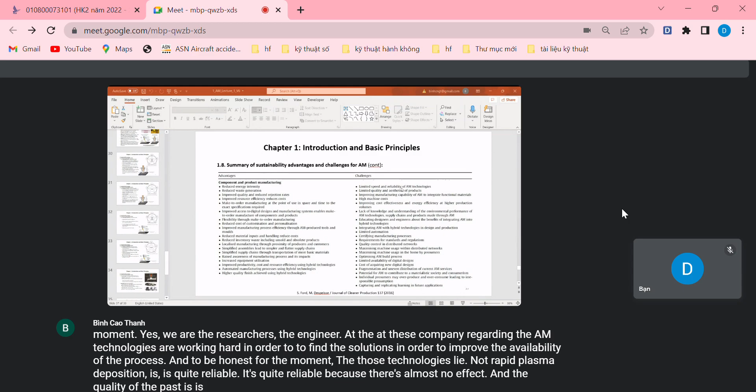Even better than the forged part. But the other technologies need to be improved as well. And yeah, this is the point.

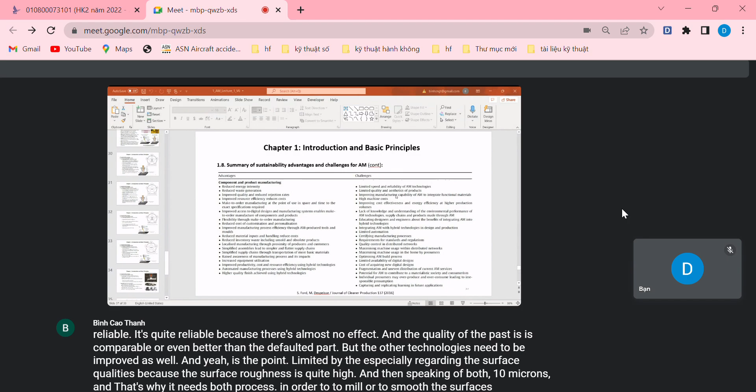Limited quality, especially regarding the surface qualities, because the surface roughness is quite high, generally speaking above 10 microns. That's why it needs post-processing in order to mill or smooth the surfaces, which negatively affects the aesthetics of the product.

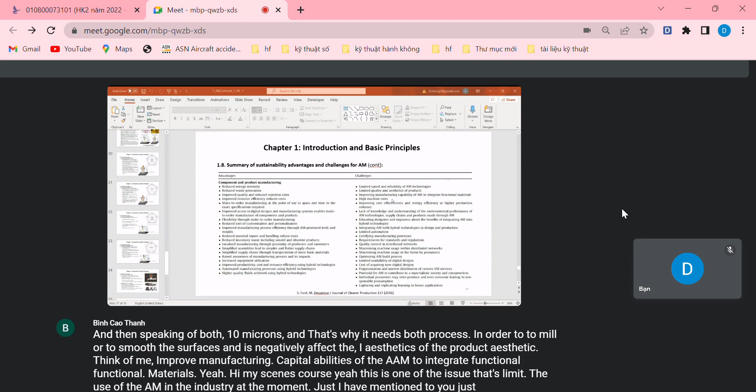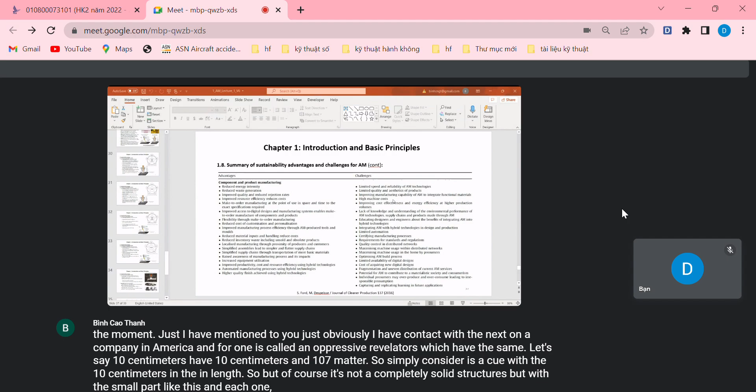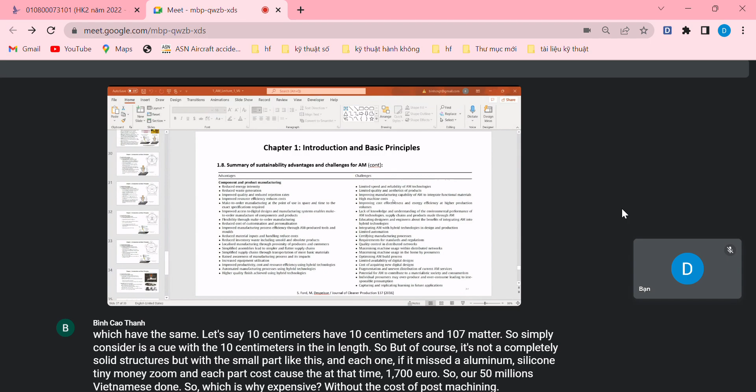High machine costs. Yeah, this is one of the issues that limit the use of AM in industry at the moment, because as I mentioned to you previously, I have contact with an external company in America, and for one part called pressure regulators, which have the shape of, let's say, 10 centimeters by 10 centimeters by 10 centimeters, so simply consider it a cube with 10 centimeters in length. Of course it's not a completely solid structure, but with small parts like this, if made of aluminum, silicon, tin, magnesium, each part costed at that time 1,700 euro, so around 50 million Vietnamese dong. Which is quite expensive without the cost of post-machining, just the 3D printing cost. So high machine cost and high material cost as well, because it's not easy to fabricate aluminum alloy powders.

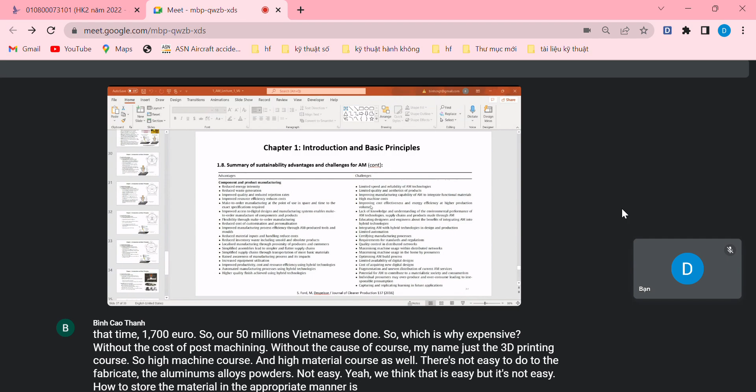Not easy. We think that it's easy, but it's not easy. How to store the material in the appropriate manner is a strict process as well. We have to carefully handle the powders, not only for human health, but also for the quality of the input material. So one of the reasons that the costs are really high.

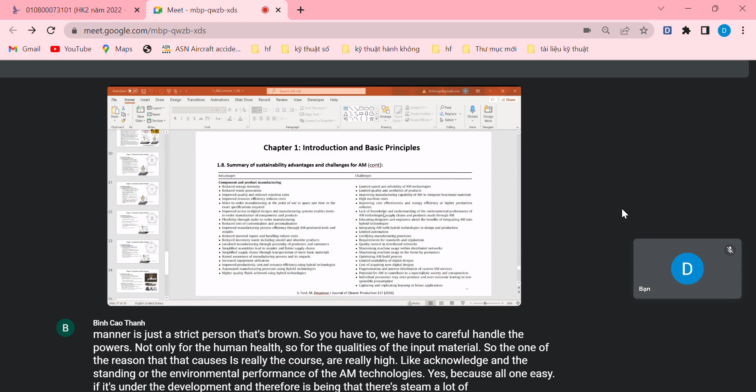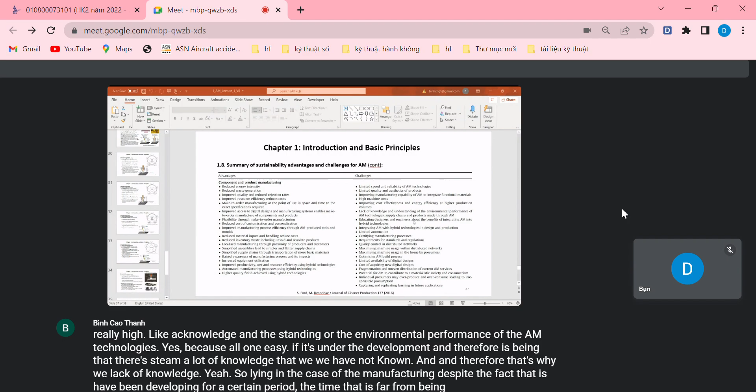Lack of knowledge and understanding of the environmental performance of the AM technologies. Yes, because this is an issue still under development, and therefore there's still a lot of knowledge that we have not known, and that's why we lack knowledge. So like in the case of additive manufacturing, despite the fact that it has been developing for a certain period of time, it is far from being fully explored, and that's the point.

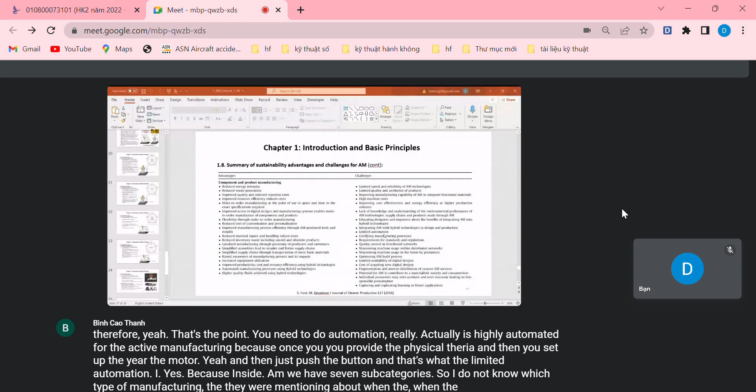Limited automation, really? Actually, it's highly automated for additive manufacturing, because once you provide the feedstock material, set up the motor, and then just push the button, that's all. Limited automation, because inside AM we have 7 subcategories, so I do not know which type of additive manufacturing they were mentioning when they wrote here limited automation. It's hard to discuss this, but okay.

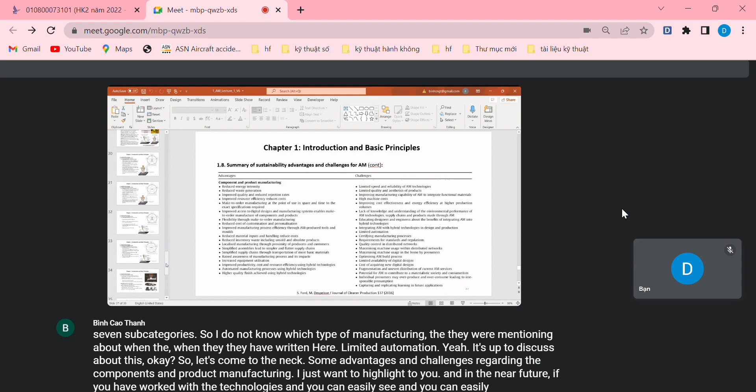So let's come to the next: some advantages and challenges regarding components and product manufacturing. I just want to highlight to you, and in the near future, if you have worked with the technologies, you can easily see and find the disadvantages and advantages of the technologies that you are working with.

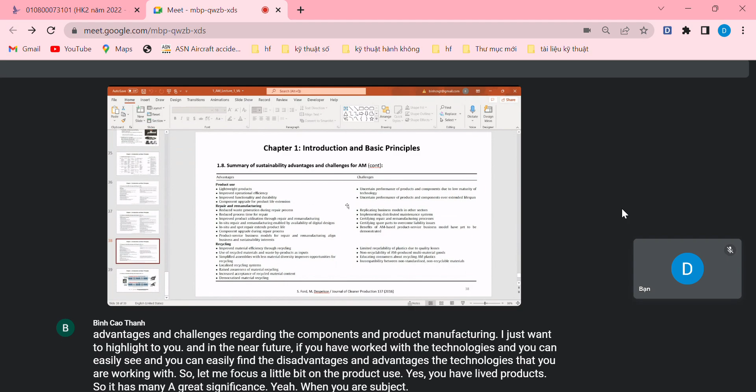So let me focus a little bit on the product use. You have a lightweight product, so it has great significance when you subject these products to the utilization phase. Improve operational efficiency, sure. Improve functionality and durability, yes. And upgrade for product life extension, for sure. This means that you can upgrade, you can optimize the part. So in other words, after the upgrade, you can improve the performance, especially regarding the product life. So the life can be extended, it's simply like this.

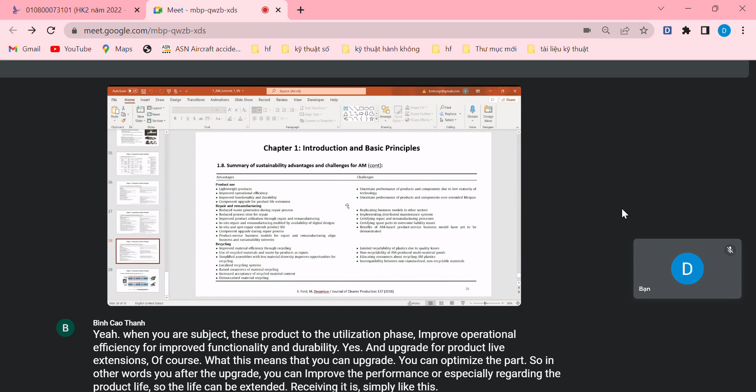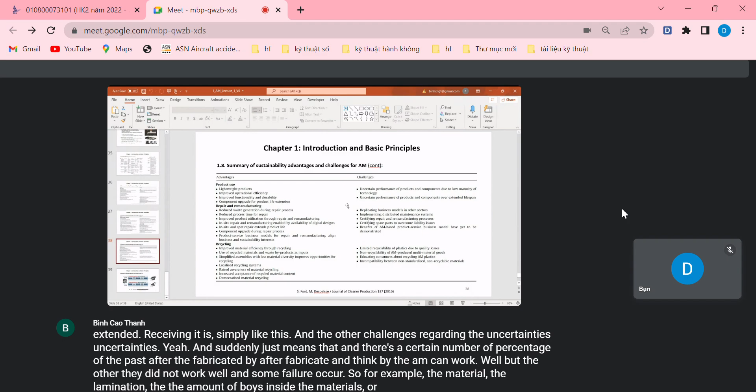And the other challenge is regarding the uncertainties. Uncertainty just means that there's a certain percentage of parts fabricated by AM that can work well, but others do not work well and some failure occurs. So, for example, material delamination, the amount of voids inside the materials, or part distortion after the fabrication process, may occur for the 3D printed part, and what happened with them during the manufacturing process, the researchers do not have the evidence to find the reason why it is like this.

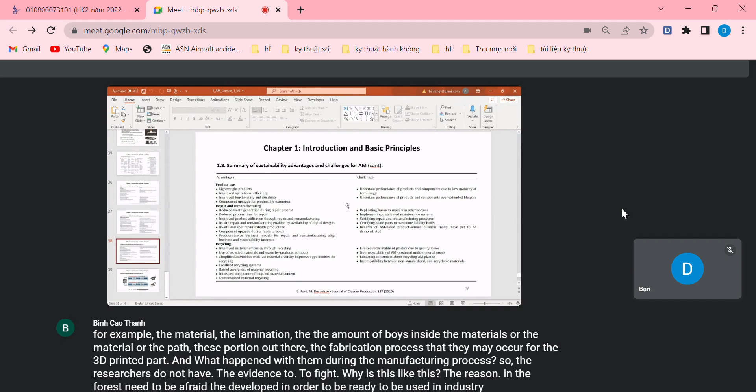And therefore it needs to be further developed in order to be ready for use in industry, especially in cases where, for example, if it's used to fabricate unimportant parts, that's fine, it's just for decoration. But for those parts that work with high safety factors, in that case we must be sure about the performance of the part, to check it, to verify it, to validate the part, before we can subject it to the market.

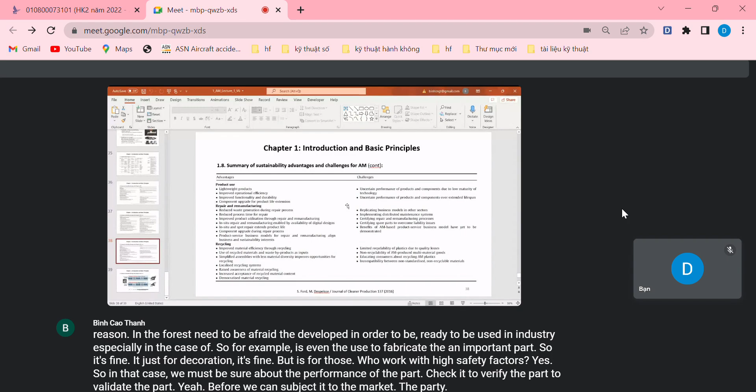Repair and remanufacturing. Reduce the waste generation during the repair process. Yeah, it depends, it depends. Recycling. Okay, so I think there are too many points, and if you like, you can read more at home.

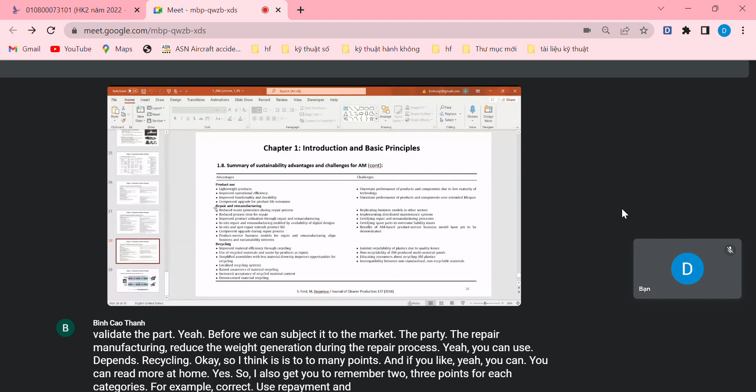So I would suggest you remember 2 or 3 points for each category, for example product use, repair, manufacturing, and remanufacturing. Remember 2 or 3 points so that in case of need, you still have some knowledge and understanding to answer the questions. This is a good approach.

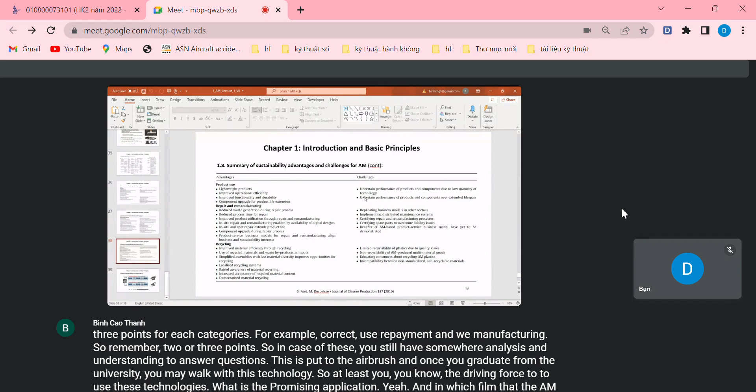When you graduate from the university, you may work with this technology, so at least you should know the driving force to use these technologies. What are the promising applications? In which fields can AM be used to fabricate or repair parts, and how it can contribute to future sustainability.

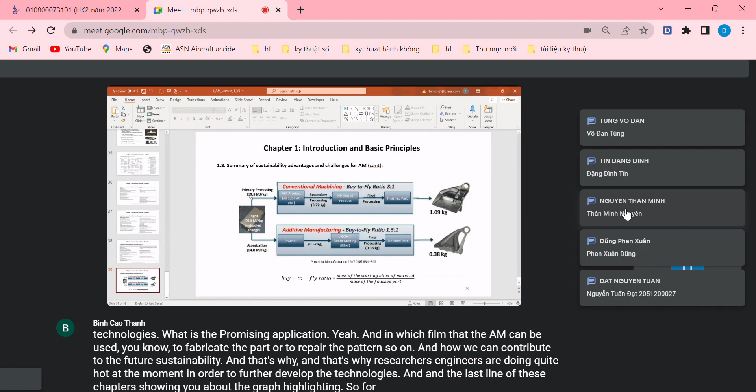And that's why researchers and engineers are working quite hard at the moment to further develop these technologies. The last part of this chapter shows you a graph highlighting, for example, starting from the ingot until the point that we have the final part.

If you use conventional machining or manufacturing, you have the buy-to-fly ratio, which is equal to 8 divided by 1. The definition of the buy-to-fly ratio is the ratio between the mass of the starting billet and the mass of the finished part.

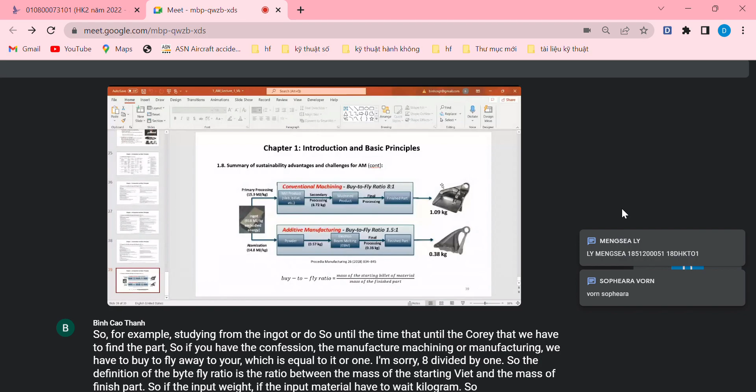If the input material has a weight of 8 kilograms, after the cutting process we still have a part of 1 kilogram. So we eliminate more or less 7 kilograms, and these 7 kilograms are seen as waste because we cut.

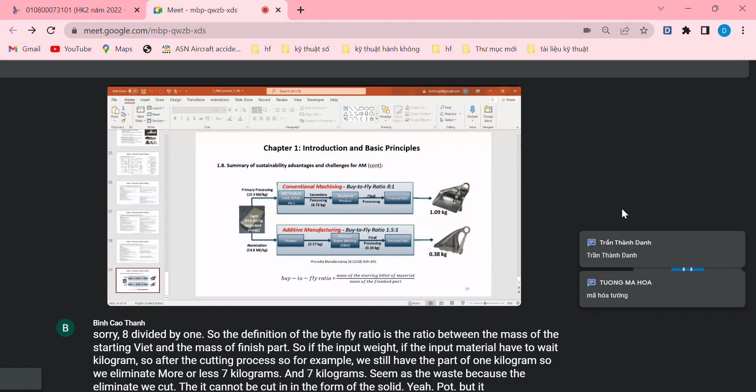It cannot be cut in the form of a solid part all at once, but it must be cut gradually, layer by layer. This is the limitation of the machining process. You cannot cut it like a blob, but must cut it layer by layer.

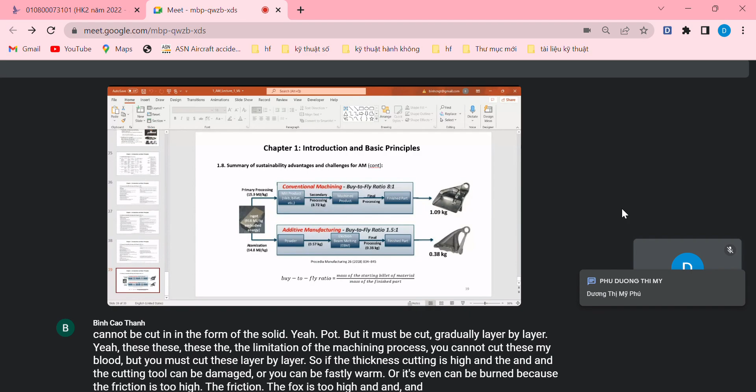If the cutting thickness is high, the cutting tool can be damaged or worn quickly, or it can even be burned because the friction is too high. The friction force is too high, and the tip, edge, or cutting edge of the cutting tool can be worn or even burned. If the heat is too high, it can treat back the material of the cutting tool and reduce its strength and hardness, negatively affecting cutting efficiency.

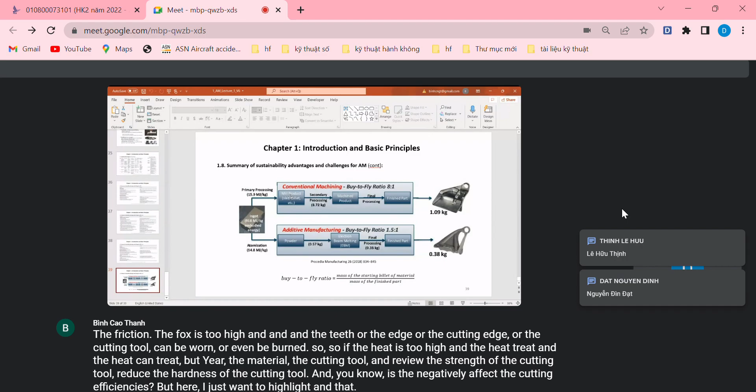Here I just want to highlight that the input material is 8 kilograms, for example, and the final part is just 1 kilogram. You waste 7 kilograms of material. In other words, you do not save money associated with the material, and the energy required for the cutting process is also high because you need to cut.

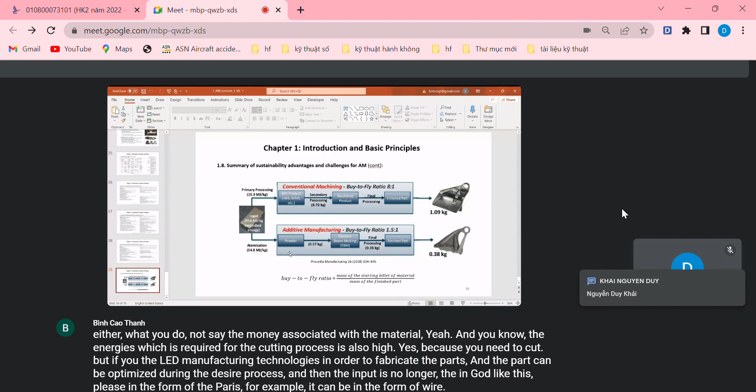But if you use additive manufacturing technologies to fabricate the parts, the part can be optimized during the design process, and the input is no longer an ingot like this, but in the form of powder, or it can be in the form of wire. The input material is greatly reduced, so just around half a kilo.

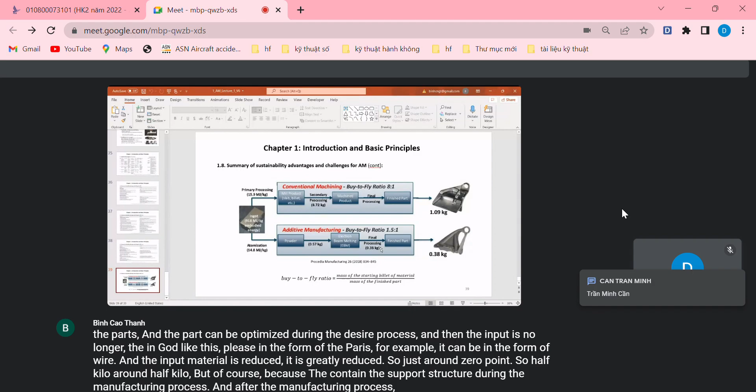But of course, it contains a support structure during and after the manufacturing process. With additive manufacturing, you must eliminate the support structure because it's not necessary — we do not need the presence of the support structures. After eliminating the support structure, we have a final part weighing more or less 0.400 kilograms, let's say.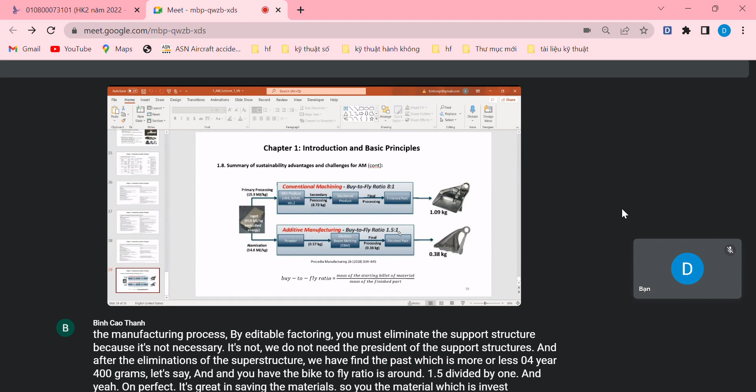And you have a buy-to-fly ratio of around 1.5 divided by 1. This 1.5 is great for saving materials, so the money invested in buying material is greatly improved — you save the amount of materials.

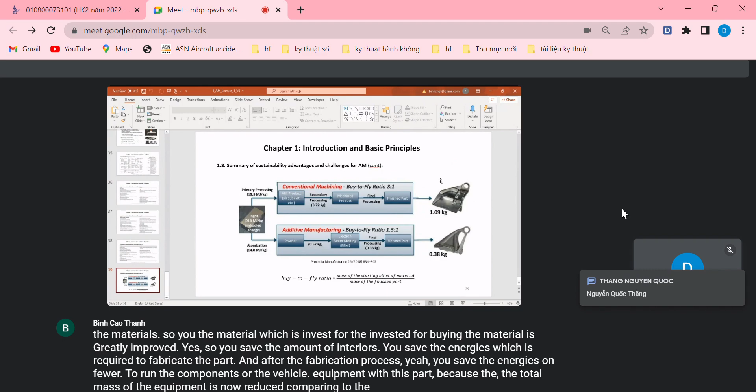You also save the energy required to fabricate the part, and after the fabrication process, you save energy or fuel to run the components or vehicle equipped with this part, because the total mass of the equipment is now reduced compared to the previous case, giving higher fuel efficiency. It's better for sure.

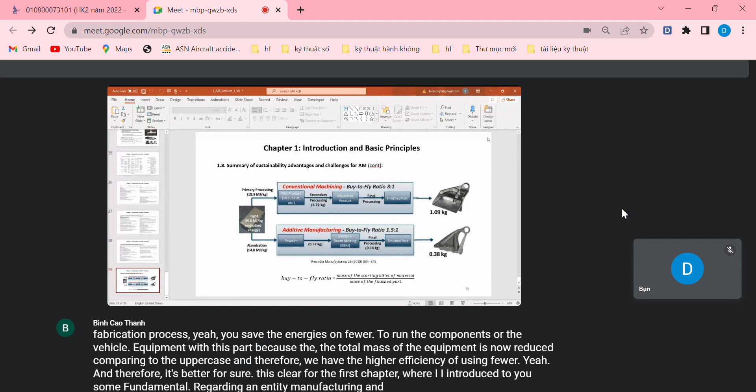So that's clear for the first chapter, where I introduced some fundamentals regarding additive manufacturing and basic principles, especially regarding the 7 additive manufacturing technologies that we discussed during the first chapter. Now we have more or less 24 minutes left, and let me show you the second chapter. I'll stop here.

I like online teaching in terms of the fact that I can stay at home and work with you online. But I would also like to interact with students, so I would prefer a class like this so I can discuss with you face to face.

So I believe I already uploaded chapter 2 on the RMS system. I suppose you could download the document for studying, even if you're studying on your own. You study on your own, no problem.

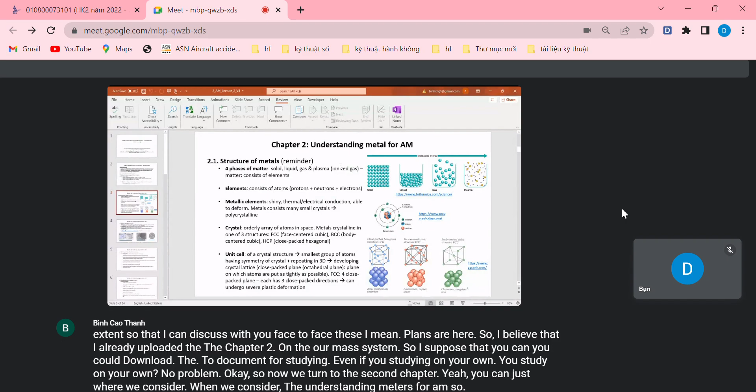Okay, now we turn to the second chapter, where we consider the understanding of metals for AM. In the first chapter we learned several AM technologies, and there's a wide range of materials that can be used for different kinds of AM technologies. However, within the course of additive manufacturing that I deliver to you, I would just like to focus on the understanding of the metals.

But it's up to you. If you want to study other materials for AM, you are welcome to do so. But you should know in advance the metals used for AM, because why?

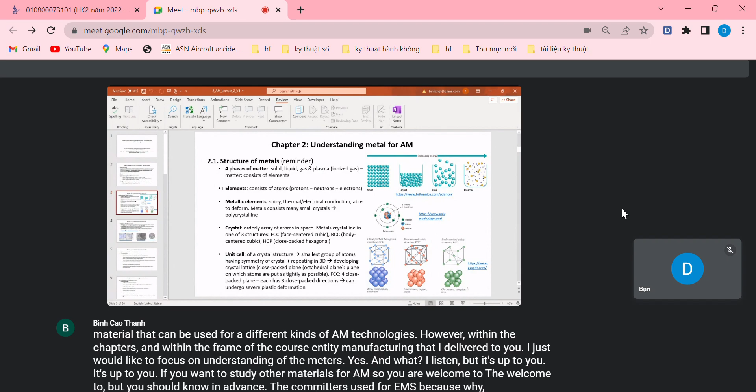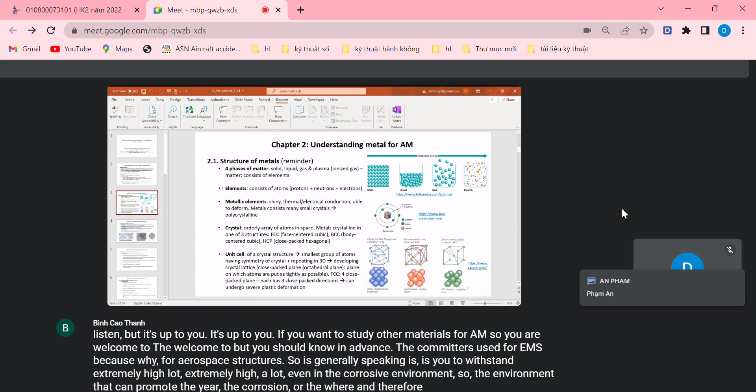For aerospace structures, generally speaking, this is used to withstand extremely high loads, even in corrosive environments - those environments that can promote corrosion or wear - and therefore normally it needs to be made of metallic materials, because metallic parts can withstand the high load, and this is the first candidate material for the aerospace industry if we use AM to fabricate. If we use AM to fabricate composite, composites will account for, let's say, 40-50% of the material in an aircraft, but that is fabricated by other technologies, not additive manufacturing.

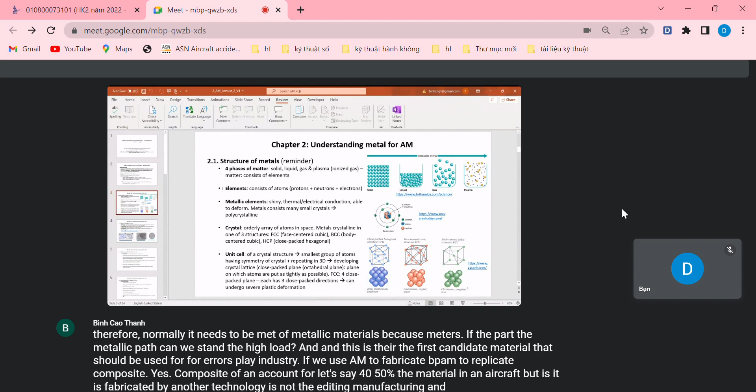If we focus on additive manufacturing, on optimizing part structures, to make the aircraft lighter, we should focus on metals, AM, structure optimization, and computer aided design. That's the reason why within chapter 2 I just focus on the metals for AM.

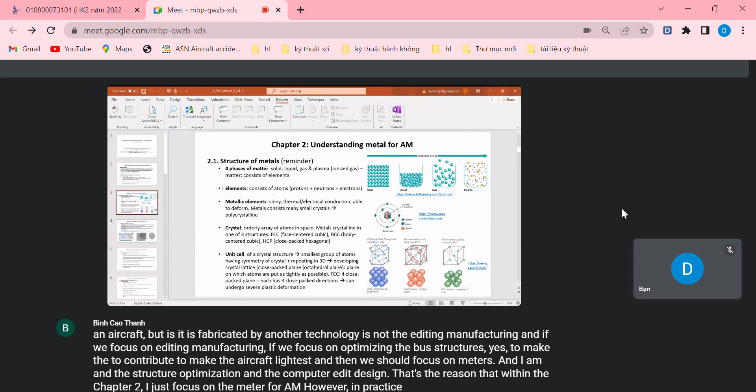However, in practice, you may remember the VAT polymerization, where the input material is photopolymer. It can also be used for slurry, concrete, ceramic materials, and so on.

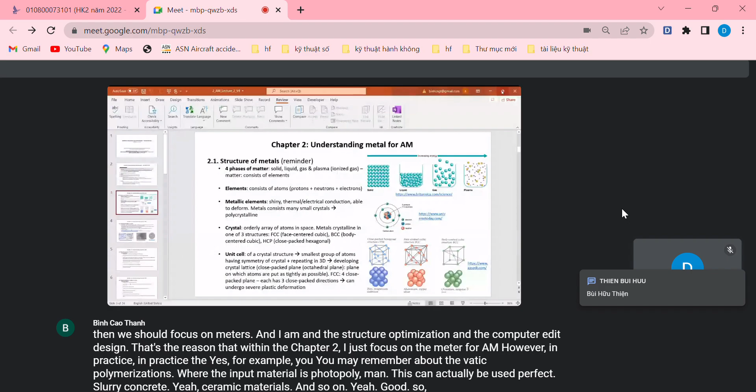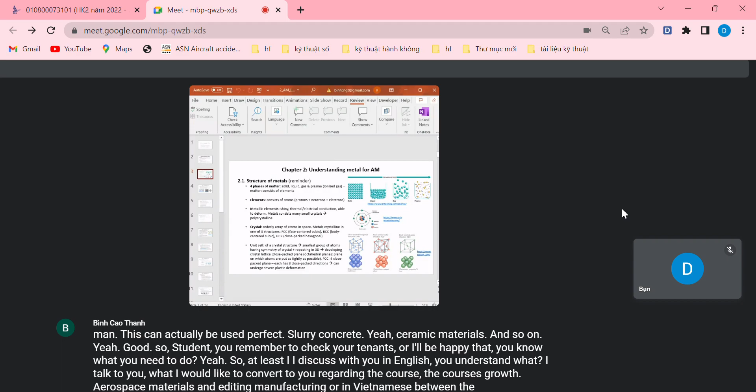So at least I discuss with you in English, so you understand what I would like to convey to you regarding the course. The course is both aerospace materials and additive manufacturing, or in Vietnamese chuyên đề 2 - I don't know how to call it in specialization terms, okay, whatever it is.

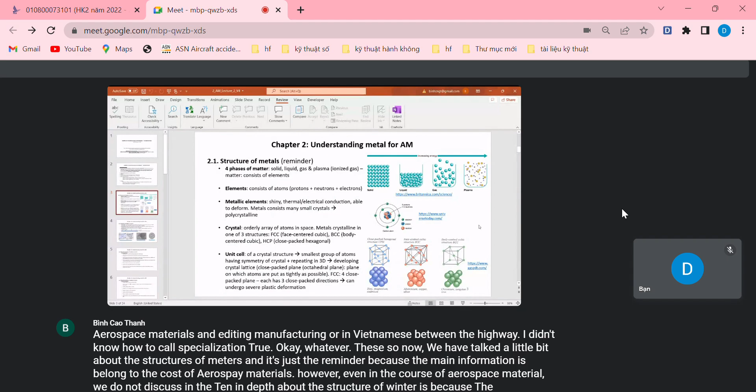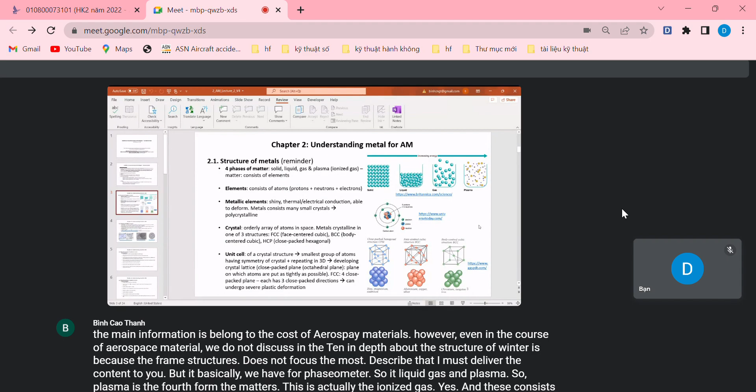But basically, we have four phases of matter: solid, liquid, gas, and plasma. Plasma is the fourth form of matter - this is actually ionized gas, and it consists of different elements. It depends on whether it has a fixed position in the lattice structure or not.

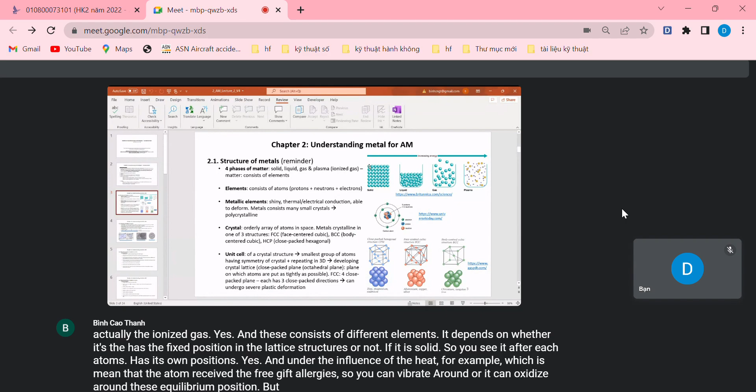If it is solid, each atom has its own position. Under the influence of heat, for example, the atom receives free energy so it can vibrate or oscillate around its equilibrium position, but generally speaking the position is still there - it tends to keep a fixed position inside the lattice structure.

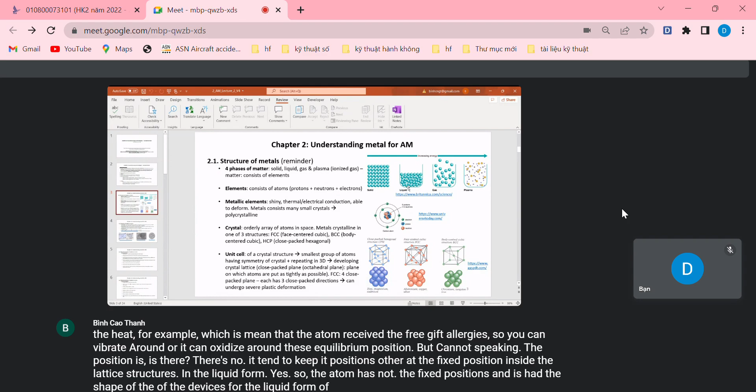In the liquid form, the atoms do not have fixed positions, and the liquid takes the shape of the device that stores it. In the gas phase, the distance between atoms is larger compared to the liquid phase. And in the plasma form, you have ionized gas - the gas is ionized.

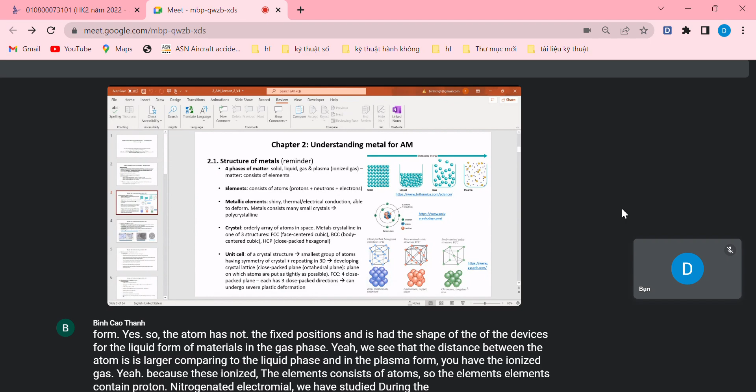The elements consist of atoms. So the elements contain proton, neutron, and electron. We have studied this during the 12th grade at high school, so I would not like to talk again about proton, neutron, and electron.

Metallic elements generally speaking are shiny, thermal and electrically conductive, and able to deform.

Metals consist of many small crystals. It actually depends on the form. The metal can have several forms: it can be the single crystal form, it can be the polycrystallized form, or it can be the amorphous form, amorphous material.

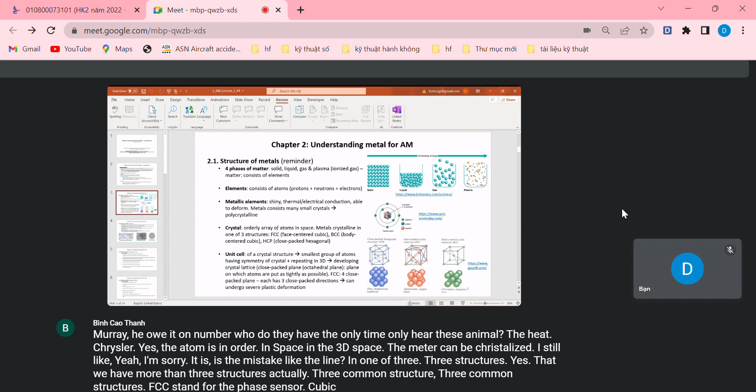Three common structures: FCC stands for face centered cubic (lập phương diện tâm). BCC stands for body centered cubic (lập phương thể tâm). HCP stands for closed packed hexagonal, this is the hexagonal closed packed lattice.

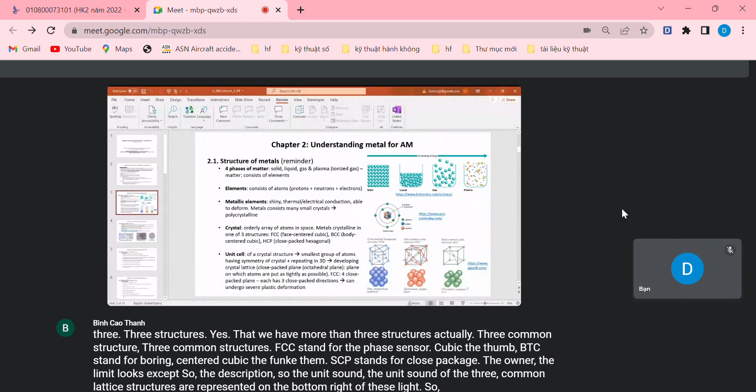So the unit cells of the three common lattice structures are represented on the bottom right of this slide, so you can see how the atoms are attached to the unit cells. The HCP structure, or some call it CPH, is the same closed packed hexagonal structure, along with face centered cubic and body centered cubic structures.

The unit cell of the structure is the smallest group of atoms, because it repeats in 3D. So instead of considering a lot of atoms in the 3D lattice structure, we just consider the smallest group of atoms having the symmetry of the crystal. So it's quite easier.

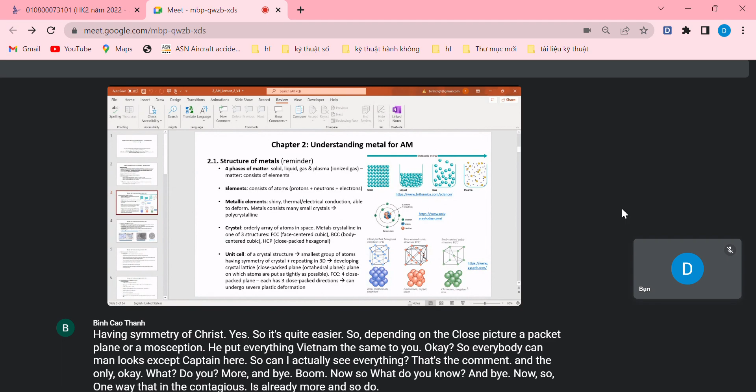So FCC, for example, has 4 closed packed planes, and each has 3 closed packed directions. Because they form triangles, that's why there are 3 in each plane. In each closed packed plane, we have 3 closed packed directions, and these can undergo severe plastic deformations.

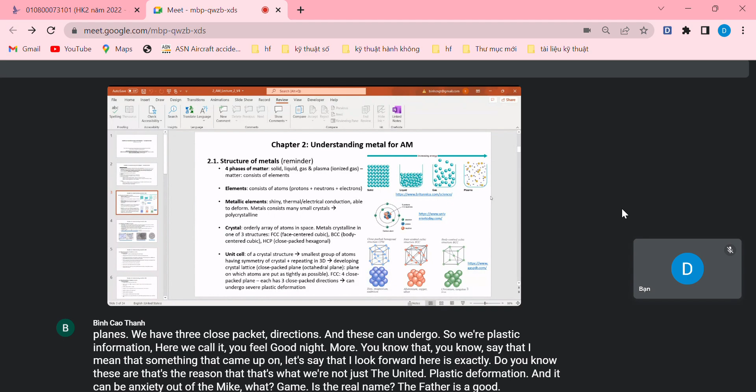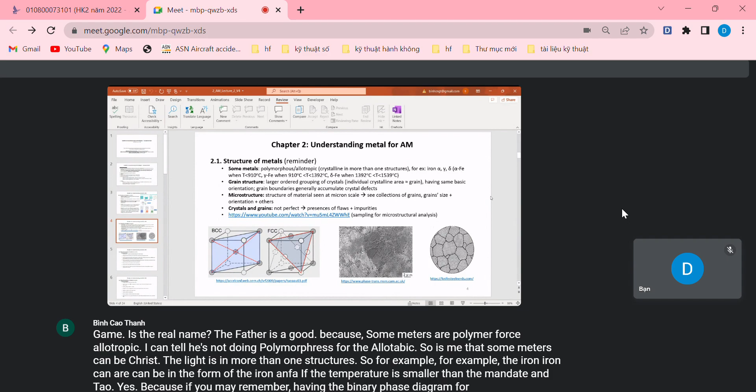So it means that some metals can be crystallized in more than one structure. For example, iron can be in the form of alpha iron if the temperature is smaller than 912 degrees C, because if you remember the binary phase diagram for iron and carbon - okay, some refer to 910, some refer to 912, so it's okay, no problem.

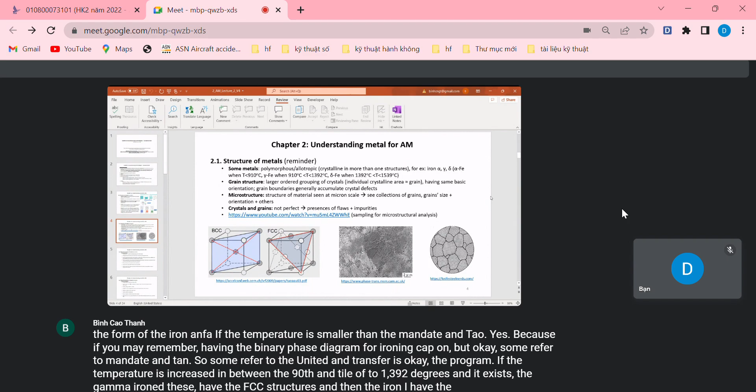If the temperature is increased, in between 912 up to 1392 degrees C, we have gamma iron. Gamma iron has the FCC structure, and delta iron has the BCC structure, as I already mentioned to you. When the temperature ranges from 1392 up to 1539 and above, above that is the liquid form, because it melts at 1539 degrees C.

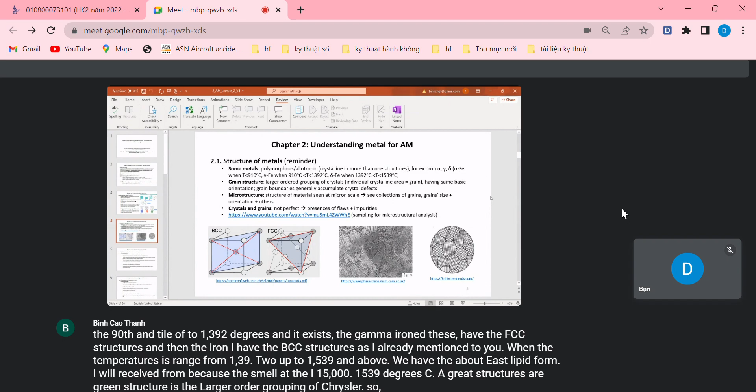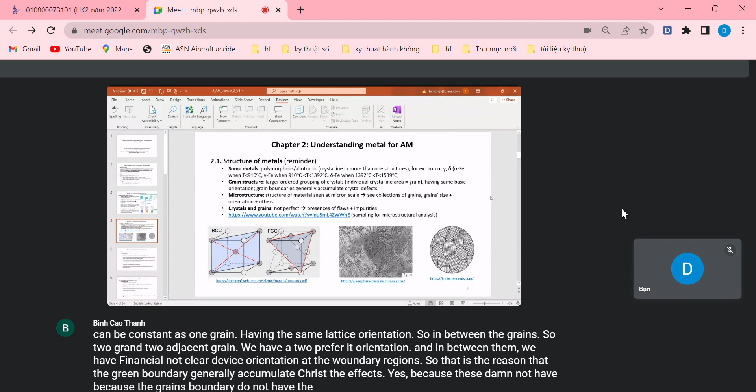Grain structures: a grain structure is the larger order grouping of crystals. Each individual crystalline area can be considered as one grain, having the same lattice orientation. In between the grains, two adjacent grains will have two preferred orientations, and in between them we have - can I say - not clearly defined orientation at the boundary regions. That is the reason the grain boundary generally accumulates crystal defects, because the grain boundary does not have a clear lattice orientation, so it has crystal defects.

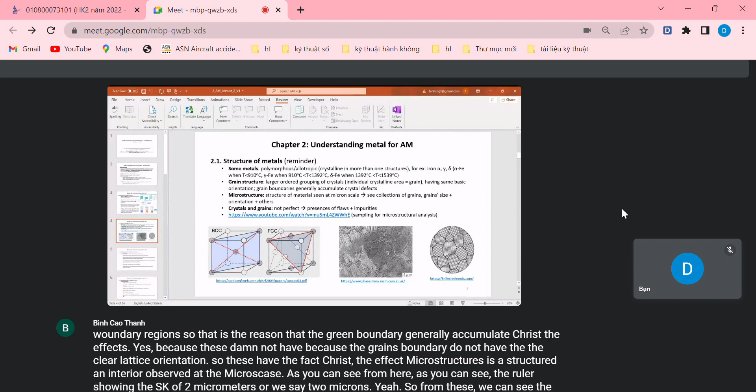Microstructure is the structure of material observed at the micron scale, as you can see here. The ruler shows a scale of 2 micrometers, or 2 microns. So from this we can see the size of the lamellar structures, or the size of the grain. Each lamellar colony defines a grain, and each grain consists of a layer of brighter color and darker color, but here we do not know which side of the material it is.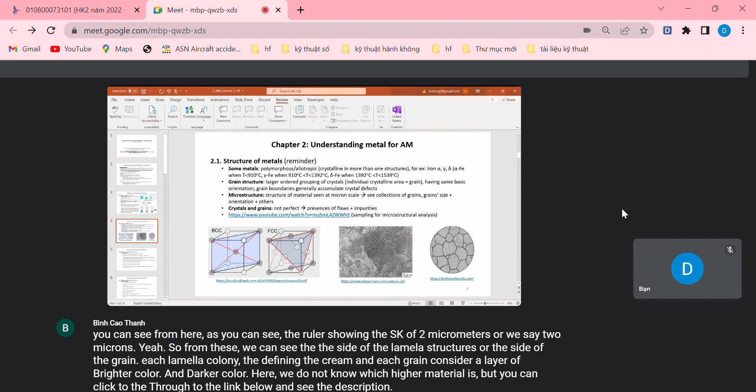But you can click the link below and see the description. The crystal and the grain, generally speaking, are not perfect - life is not perfect - so it contains flaws and impurities. Có những cái nứt gãy và có impurity giống như kiểu có cái tạp chất lẫn vào trong đó.

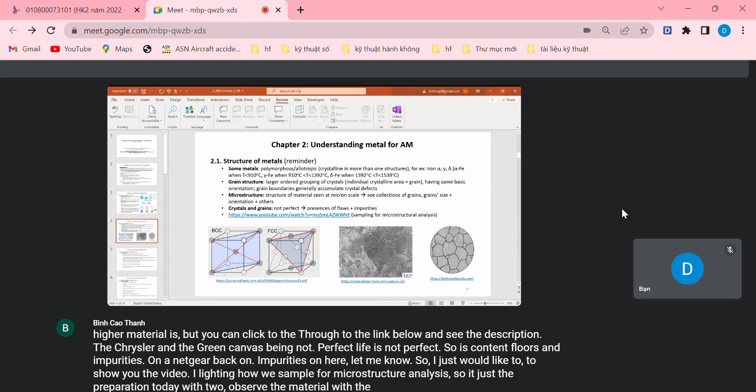So I just would like to show you the video highlighting how we sample for microstructure analysis, just the preparation to be able to observe the material with the microscope. Có nghĩa là tôi muốn show cho các bạn cái video để người ta chiếu cái phương pháp chuẩn bị cái mẫu để soi cái tổ chức tế vi của cái mẫu đó dưới kính hiển vi. Stop sharing here.

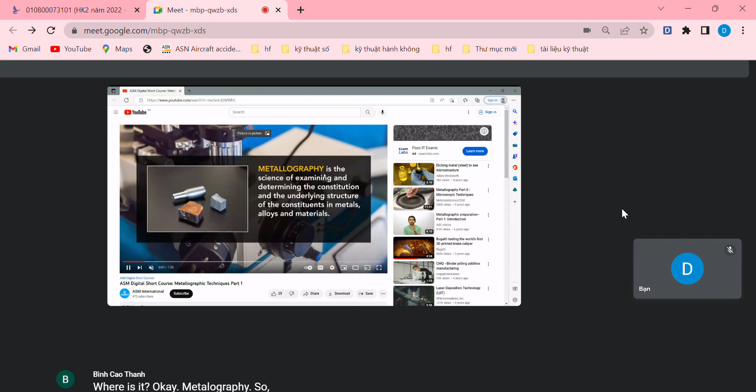Metallography is the science of examining and determining the constitution and underlying structures of constituents in metals and alloy materials. So metallographic analysis means you capture the microstructures of the materials.

The microstructures have an influence on the properties of the part. With these microstructures, you can find a way to improve them to improve the qualities of the materials. So how to prepare the sample for observation?

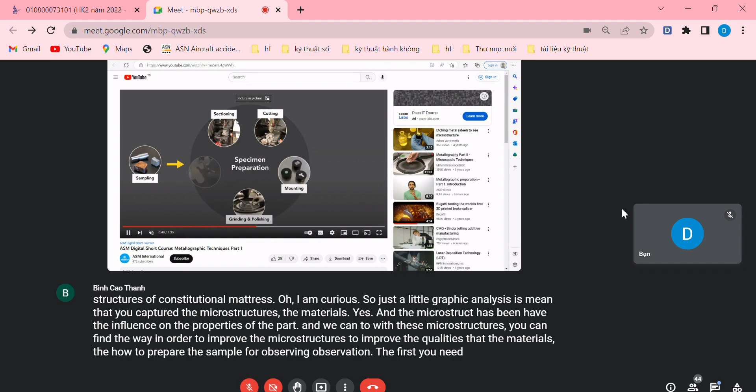First, we need to cut into small parts. So absolutely, this is a destructive examination. Cutting, and you need to mold.

You need to cut into small pieces and then mold it with polymeric materials, so it has a cylindrical shape, so you can easily hold it in hand during the grinding and polishing process.

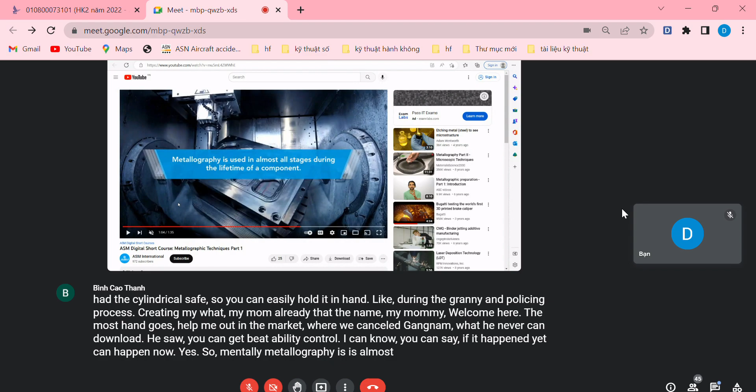So metallography is used almost at every stage during the lifetime of components, just to check. It's for material development, for production, for the manufacturing process and control, and for failure analysis.

For example, during the material development phase, you need to analyze the microstructures to see which synthesizing parameters you can improve in order to enhance the qualities of the materials.

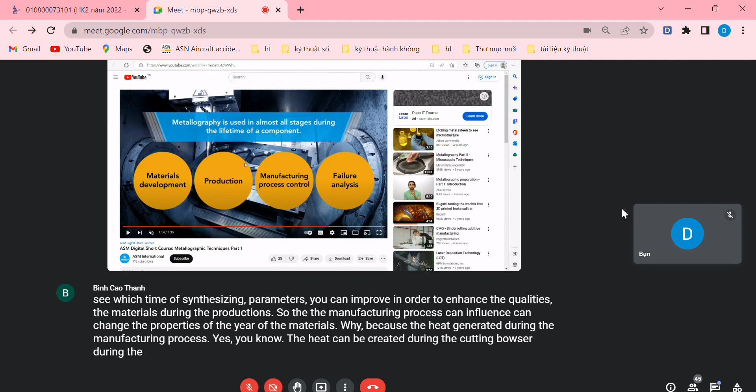During production, the manufacturing process can influence and change the properties of the materials. Why? Because of the heat generated during the manufacturing process, the heat can be created during the cutting process and during the heat treatment process, which can modify the properties.

Why can it modify properties? Because it changes the microstructures, and therefore it modifies the properties, and it needs to be controlled to guarantee the quality of the part after the manufacturing process.

And the failure analysis: during the operation phase, there are many factors that can influence the performance of the part, for example the temperatures, the external loads, the environment, the humidity, or substances which promote the corrosion process. These factors will modify the microstructures and lead to failure.

Therefore, in order to examine what caused the failure, we need to examine the microstructures, and something happened with the microstructure which caused the failure. That's why we need to examine the metallography, the microstructures, in order to guarantee that everything is controlled.

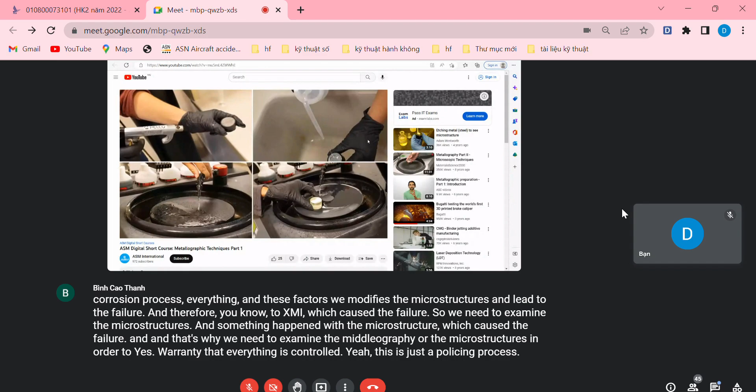This is just the polishing process, using water, using the polishing devices, and then cleaning. As I remember, they use acetone in order to clean.

Come on, yeah, it's the end. It's the way people prepare the part, or we call it sampling, in order to be able to observe the materials with the optical or scanning electron microscope. Of course, with different microscopes, you need different technologies in order to prepare samples for the observation process. But here, you see that this is just the preparation for observation with the optical microscope.